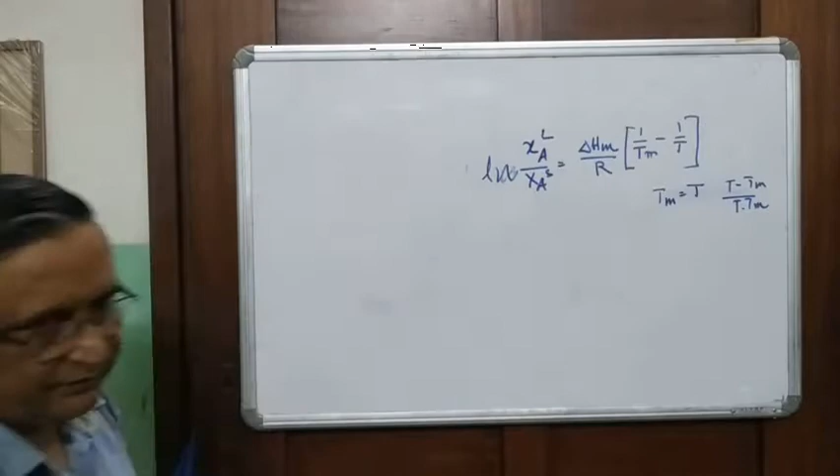Oh, I forgot, ln of this. So if we take T equal to Tm and this whole term becomes equal to 0, then we come to this relationship: XA in the liquid divided by XA in the solid is equal to 1, or XA liquid is equal to XA solid. That means if T is equal to Tm, XA in the liquid is equal to XA in the solid. So in the binary diagram, both of them have the same composition. There is no other possibility by which this can work.

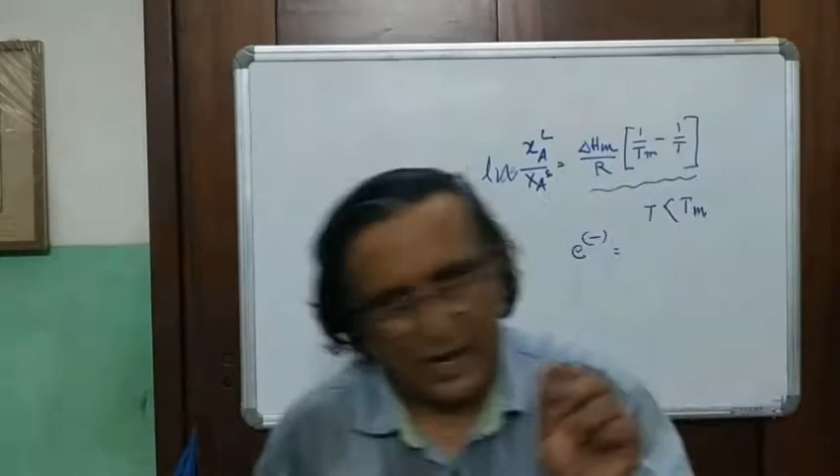But if we take it slightly differently, that T is less than Tm, then this term is negative. If this term is negative, then we have e to the power of a negative term, and so the ratio will not be equal to 1. Therefore, at a particular temperature, XAS and XAL will not be equal. That means they will have a different composition.

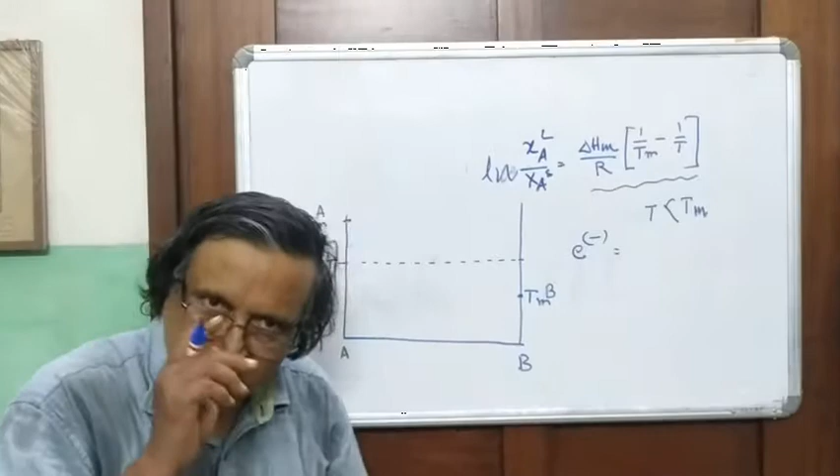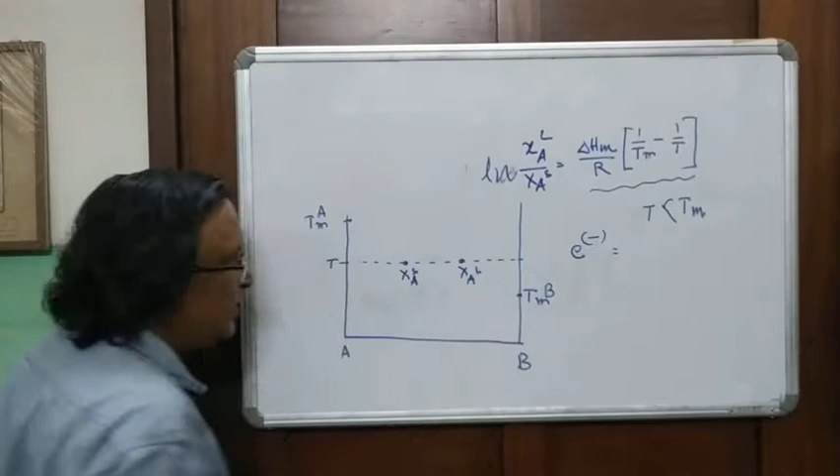So if we draw a binary diagram where we take A and B, and TmA and TmB, then if you take a particular temperature T here and draw an isotherm, XA solid and XA liquid will not be the same. They will be different. So it will be something like XAS and XA liquid. If we change the T value to another value, then obviously this ratio will also change. And similarly, for another T, this ratio will change.

So what will happen eventually to the phase diagram? We will land up with this type of a diagram: A, B, temperature. And you will end up with some sort of a figure like that. Have you understood? If you take a particular temperature here, then this is the composition of the solid and this is the composition of the liquid. Remember, here XA is equal to 1.0, and here it is 0. So at any particular temperature you will have 2 points, and this is how the phase diagram will look.

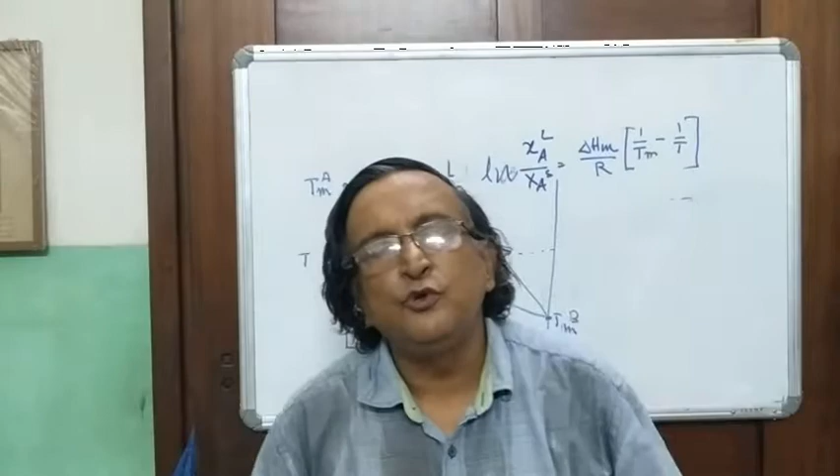Now in this diagram, this is liquid and this is AB solid solution. Do you remember in the last diagrams we called it pure A and pure B? But here I am saying AB solid solution. That means A and B are not pure phases anymore, but form a solid solution, like I talked to you about before these sets of lectures.

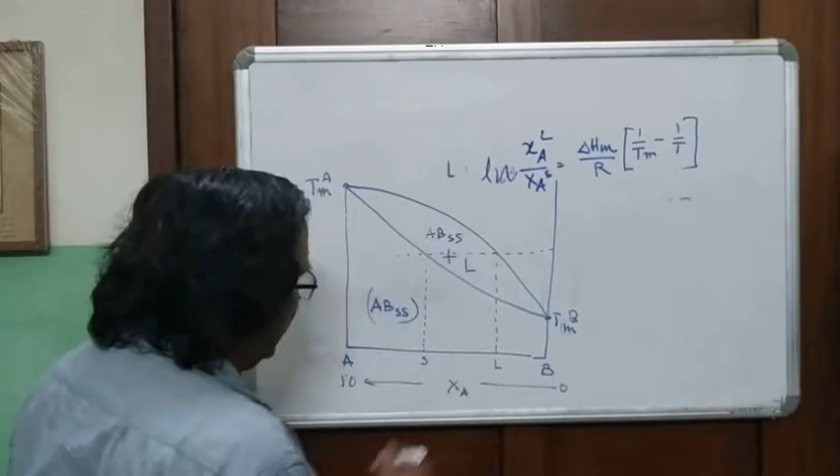And in this part of the diagram, you will have AB solid solution plus L. So this is what you get from the phase diagram. And this line, as always, is the liquidus, and this is called the solidus. So we have what is called the liquid.

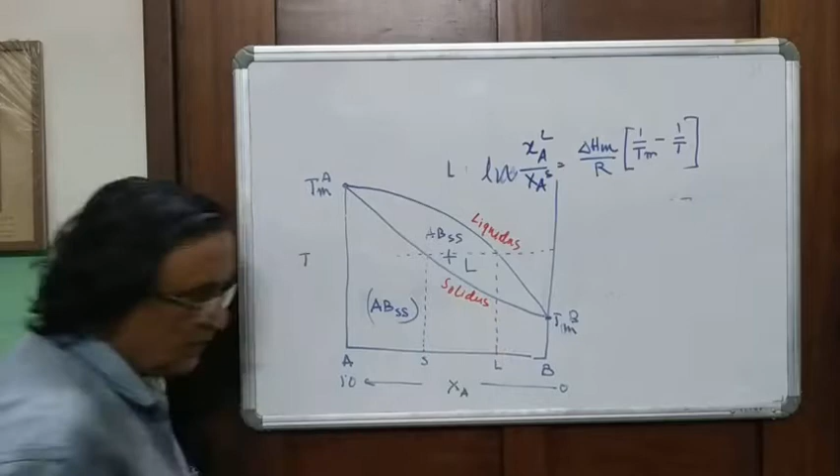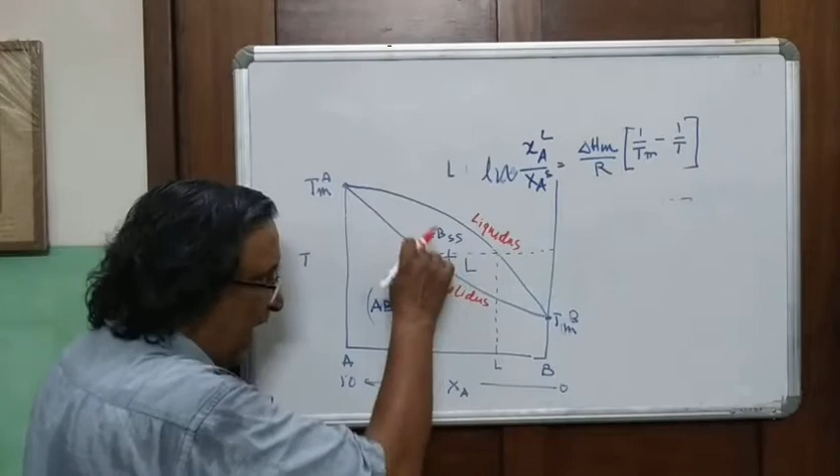Above this temperature we have the liquidus. At temperatures above this you have just liquid, and this is the solidus. At temperatures below this you have only solids, AB solid solution. And between the solidus and the liquidus you have a solid solution, AB solid solution, in equilibrium with the liquid. So this is how the phase diagram in general looks.

It can take more complex shapes, but we don't go into that at the moment. You can see you will have A and B, where one of the components will have a higher melting temperature than the other component. So this will be more refractory in this diagram as drawn. A is more refractory in nature. Refractory means it is of a higher temperature than B.

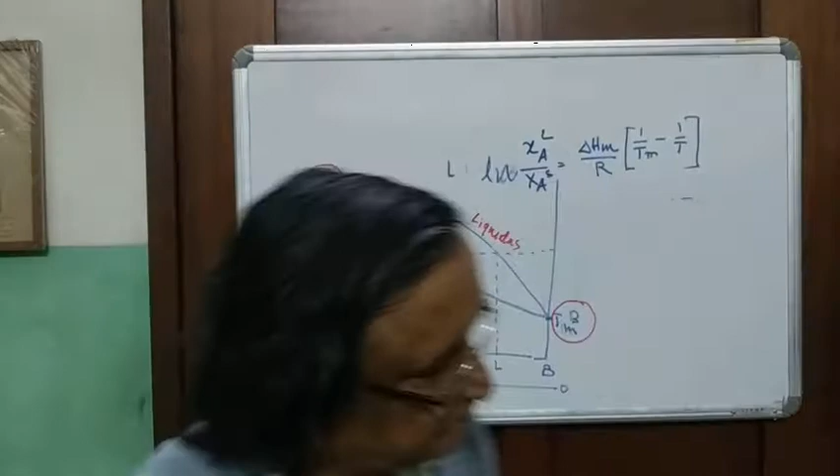So now in this lecture we will talk about how crystallization and melting occurs in this rock, involving a melt, which is a liquid solution of A and B, and a solid, which is a solid solution of A and B, and you have an intervening zone separating the liquidus and the solidus, where the two minerals and the liquid are in equilibrium. So we try and read all this diagram.

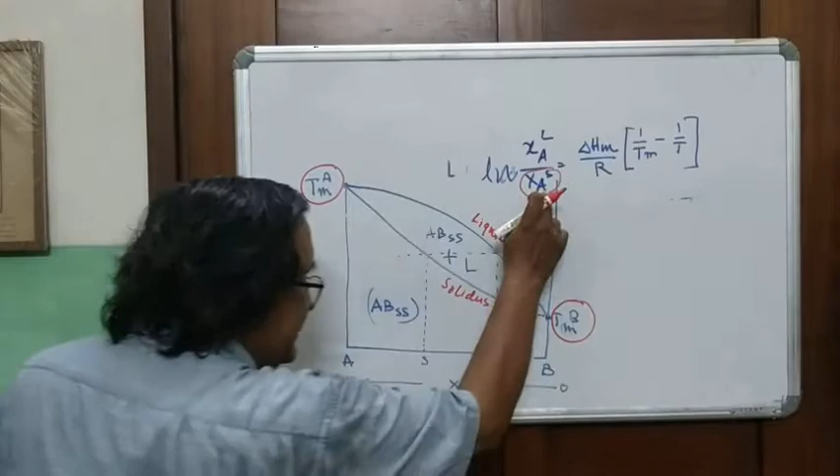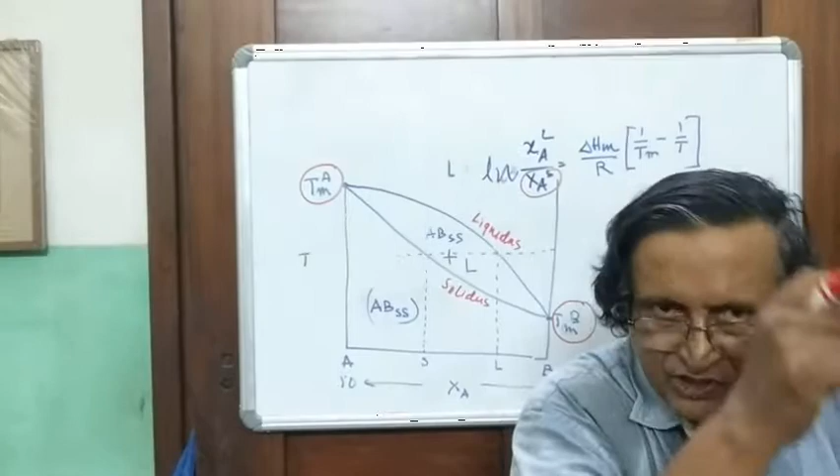So now here you see the important part played by XA solid solution. This XA is now a variable. In the last eutectic crystallization, XA in solid was not a variable. Only XA in the liquid was a variable. Here, XA solid and XA liquid are both variable. Okay, having said this, let's draw a diagram and let's get going.

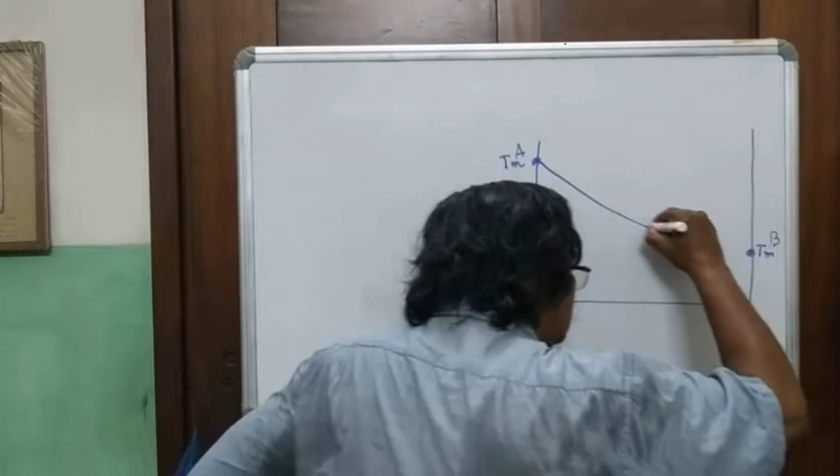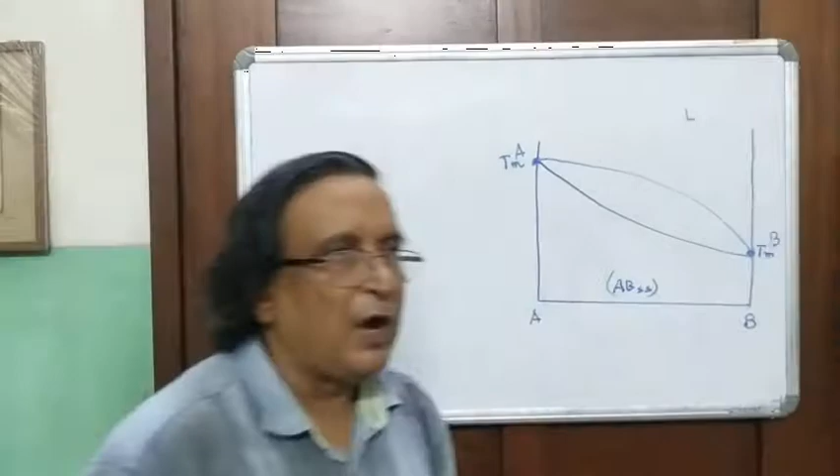Remember, the higher temperature one is the liquidus and this is the solidus. Here you have AB solid solution. Here you have the liquid, and here you have AB solid solution plus liquid in equilibrium. And first we will talk about crystallization from a melt.

Okay then. So let's take a melt of this composition. Maybe we shift the melt a little bit here. So let's say this is 50, this is 25, and this is 75, and this is XA, and this is 100 weight percent. If you write this is weight percent, then it's fine. You can also write XA, and then it would be 1 and 0. So this is, let's say, weight percent.

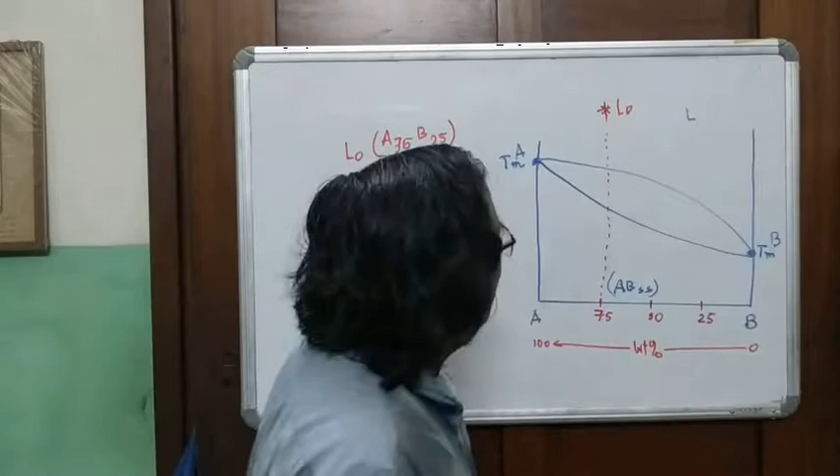So now, if we take a melt at this composition, the composition of the melt at this point of time is the initial composition, and we write this as L0, and with L0 the composition is A75 and B25. This is the composition of the initial melt. Now, if we cool down L0, this is a melt where A and B components of the melt are present in the ratio 75 A and 25 B.

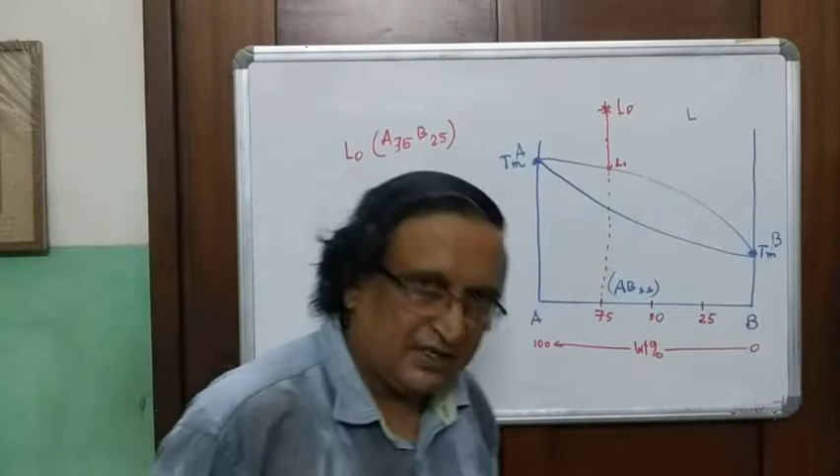And if you start cooling it, obviously the temperature goes down along this isopleth and reaches this point. This point is, let's say, L1, and this is what is called the liquidus. At this point, this field is AB solid solution plus liquid. The moment you're on the liquidus, you should be precipitating AB solid solution. So if this is L1, then this is S1, and the temperature is T1.

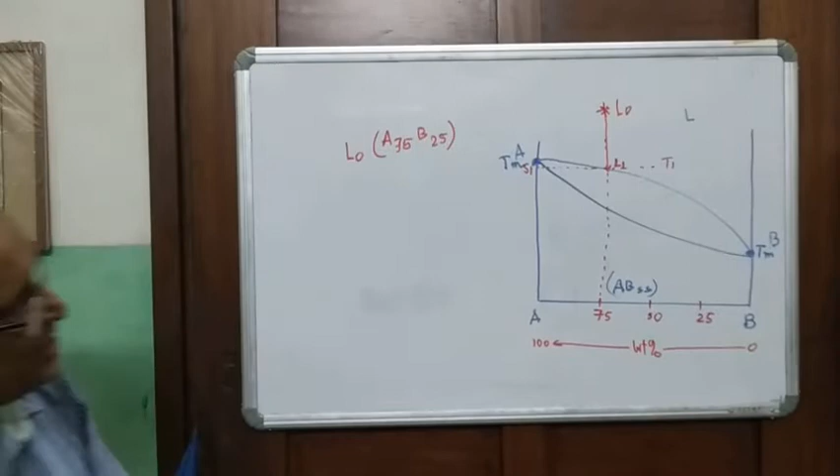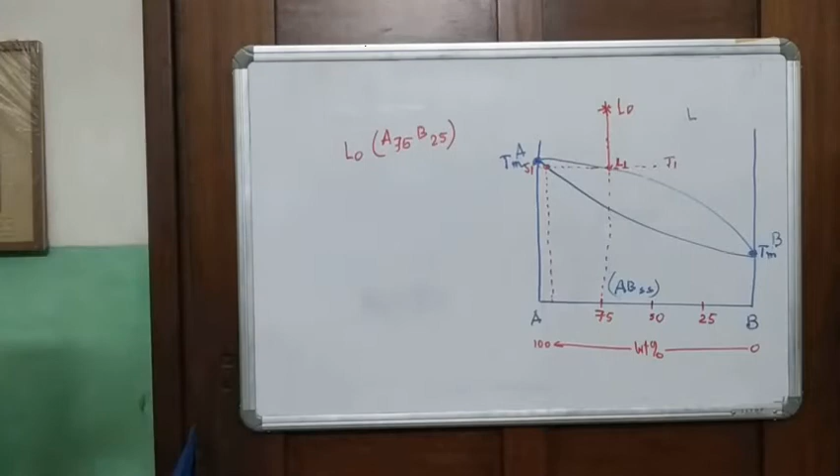So at this temperature T1, when the liquid composition lies on the liquidus, immediately the requirement has to be fulfilled that the liquid has to be in equilibrium with the solid. And how do I find out? At T1 I draw a line, and this point then is the composition of the first solid. So corresponding to L1, you produce a solid which is S1,

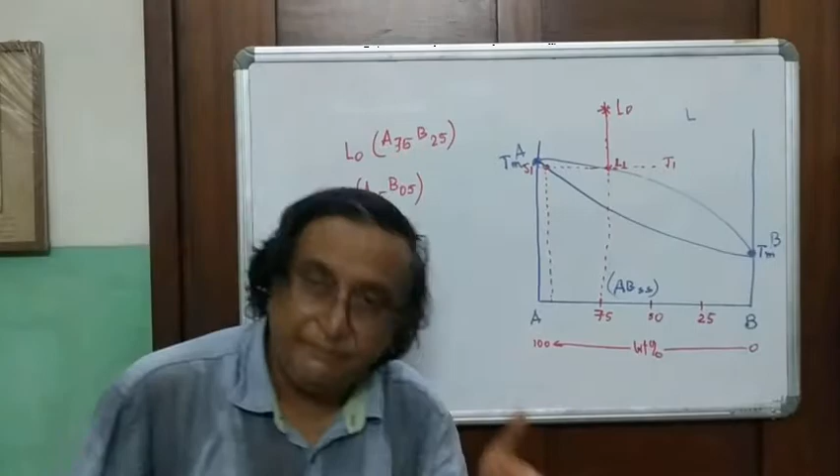and S1 has the composition of possibly A95 and B5. Now remember, this is not a mixture of pure A and pure B. Here you have a mineral AB in which the component A is 95% and the component B is 5%. This makes up the mineral AB, solid solution.

Now once this happens, where you have a liquid in equilibrium with the solid solution, this solid will precipitate and this will have a composition of A95 B05. As this solid is crystallized, obviously the melt has to move, because you see the solid has more A than the liquid. So once you crystallize this solid, the liquid composition becomes impoverished in A. So the liquid becomes enriched or richer in B.

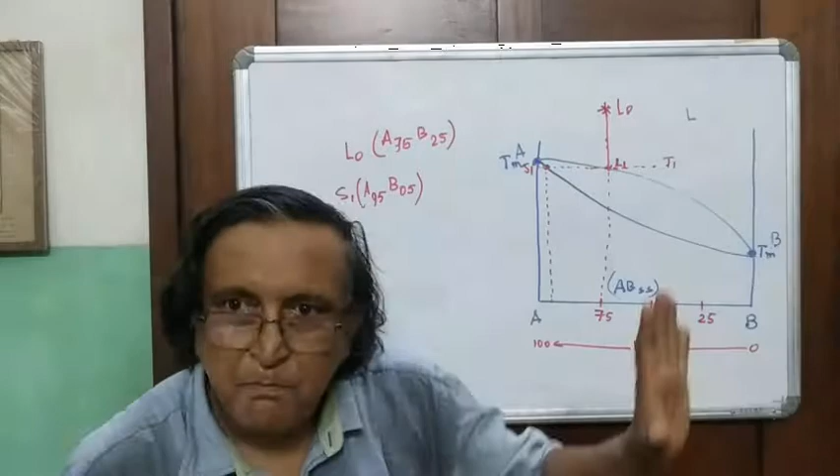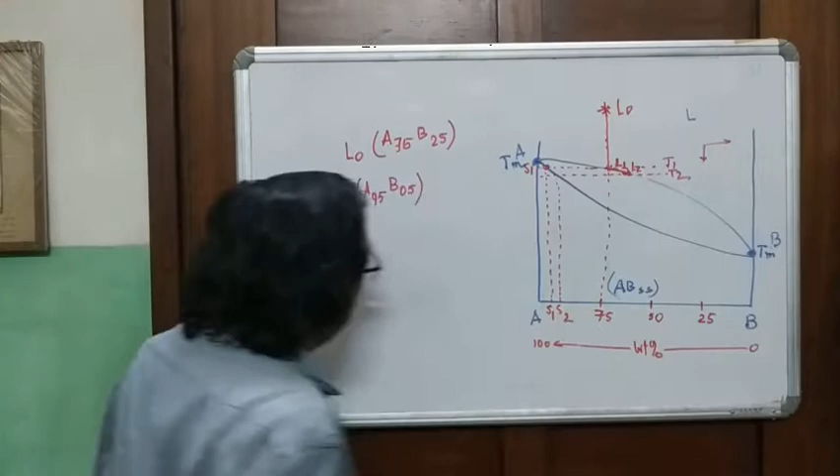So the liquid composition moves in this direction, but at the same time you have cooling, so this is also the direction. So effectively the liquid composition moves along the liquidus, and yet you have an equilibrium between the crystallized solid and the melt. So you have a new liquid composition L2 at a temperature T2, and this line intersects the solidus, and this gives you the composition. This one was S1, this one is S2. And S2 is A90 B10.

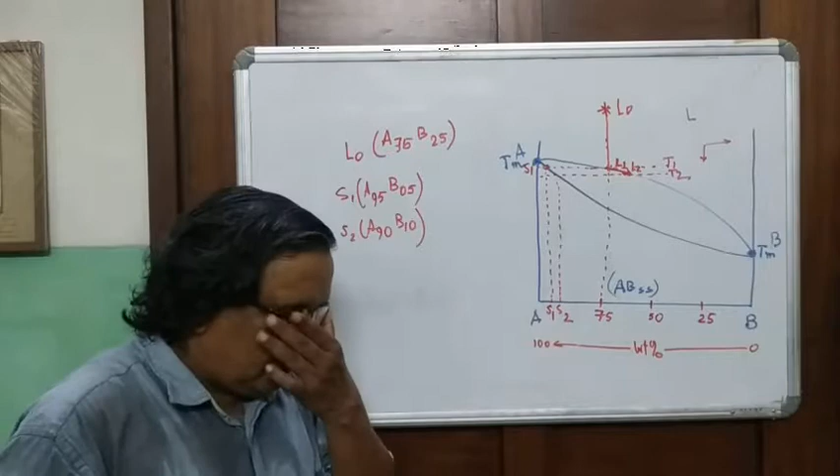Now you can ask me, what is this? You must understand that the S1 solid was in equilibrium with L1, which had this composition. Now the liquid composition has moved to L2, at temperature T2, and at this temperature, if you draw a line, it intersects the solidus curve here, and you produce S2. That means the solid S1 has now been converted to solid S2.

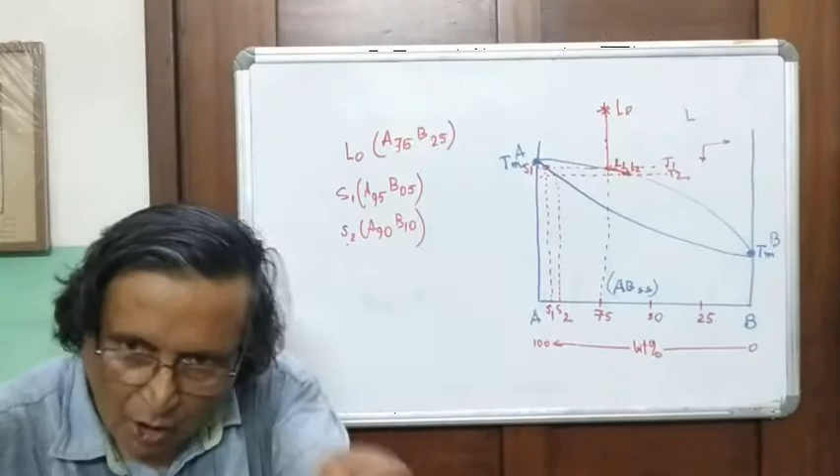Solid S1 has been converted to solid S2, meaning that the composition of the mineral has changed. Previously, if you remember, when we were discussing the eutectic, the composition of the mineral was always fixed and it was pure. Here, the composition of the mineral changes. That is very important.

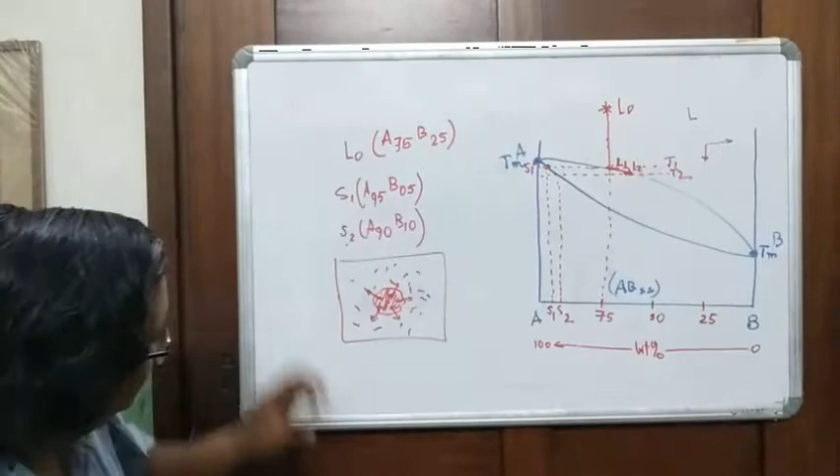That means what? If you have a crystal that is crystallizing, and outside you have a melt, and this forms a particular system, then there is constant interaction between the crystal and the melt. There is constant element transfer between the crystal and the melt. As this crystal changes from S1 to S2, if the composition of the mineral has to change, then the melt composition with which S2 is in equilibrium has also got to change, because it's a closed system and nothing comes in, nothing goes out. Right?

So in this type of diagram, the most important difference is that the crystal and the melt always exchange matter across crystal-melt boundaries. And another thing is happening here. If this point is S2 and this one is L2, and if I write this one as L0, then you can see this divides it into two parts: S2 L0 and L2 L0. Can you see this?

Now, as we have done before, if I write this as M and this as N, then M divided by M plus N should give you the fraction of the melt. Have you understood? And this part, L0 L2, the factor N divided by M plus N, is the fraction of the solid.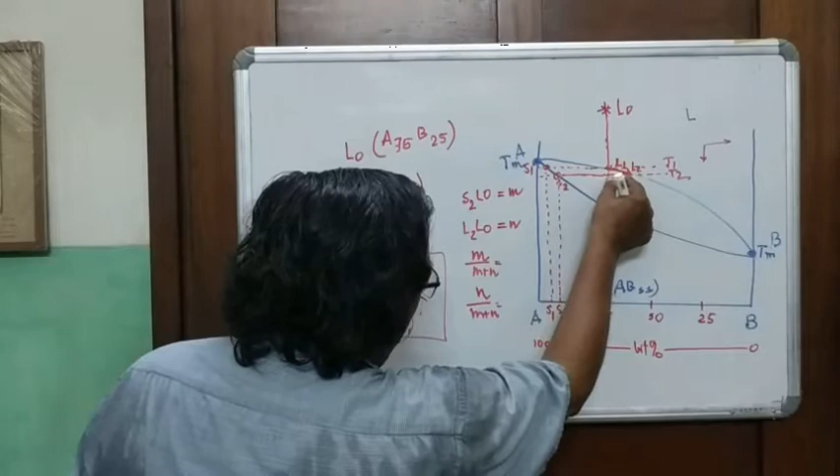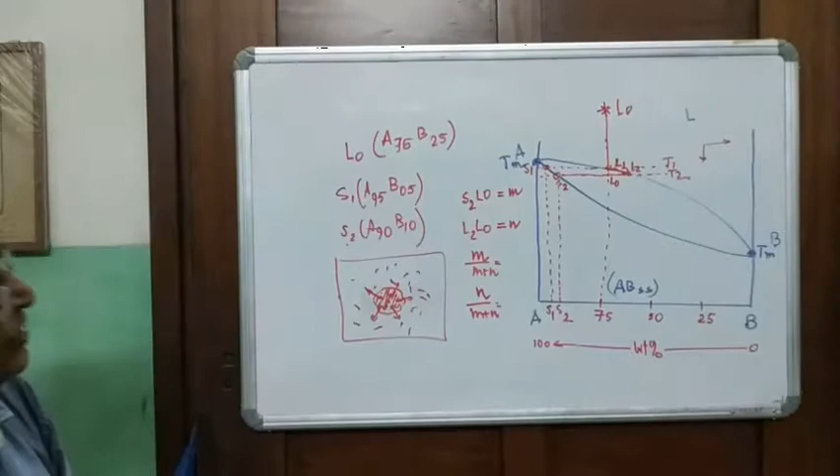So going from L1 to L2, two things have happened. The fraction of solid has increased, because the length of N has increased, and at the same time the composition of the solid has also changed. The composition of the mineral has changed, as well as the crystal-melt ratio, and you have a much larger fraction of the rock. Have you understood? So this is how crystallization continues.

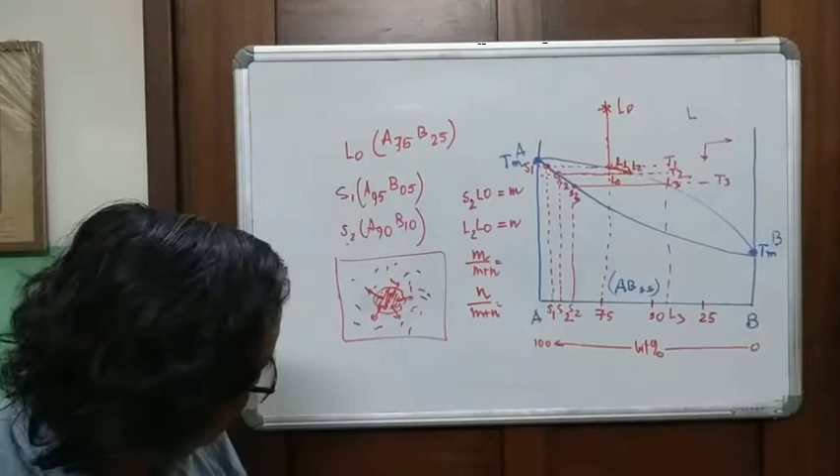So you can imagine another point. This will be T3, this will be S3, and now this will be L3. Here you can find out the composition of S3 from this axis, and here you can find out the composition of L3. The L3 and the S3 compositions are different.

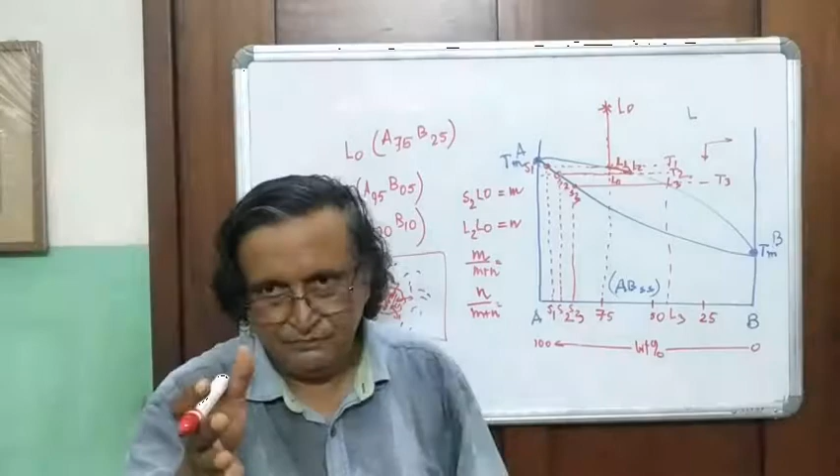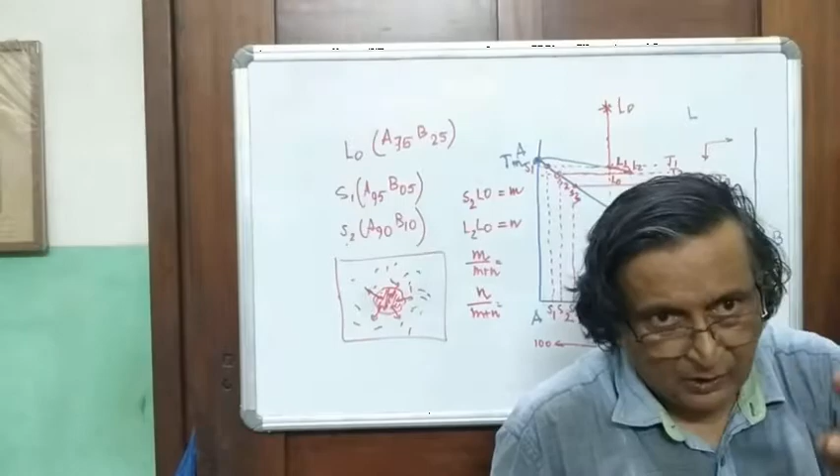That is why in the equation that I showed you, ln XA liquid by ln XA solid was a decimal. So they are not the same, they are not identical. And ln was negative, and therefore it was not 1. So now what is M now? M now is this. Can you see? This is now M.

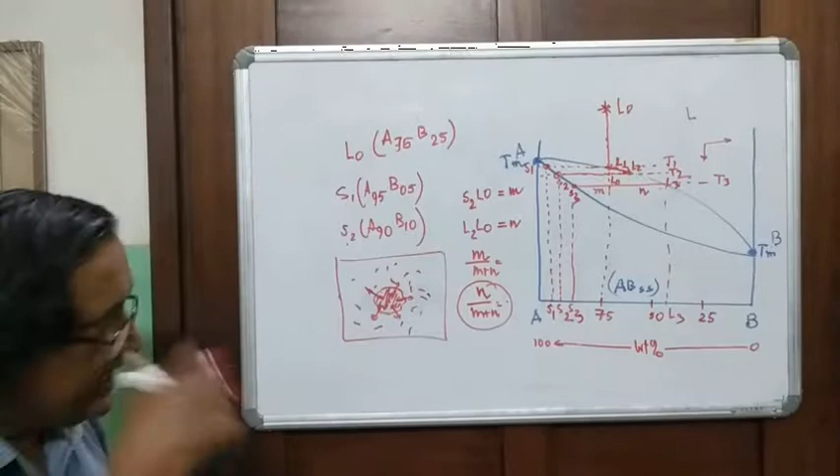You can see you started from M with N almost equal to 0 here, and now as crystallization has progressed, N has become larger and larger, and M has become smaller. And M divided by M plus N, which is the fraction of the liquid, is becoming less, and N divided by M plus N, which is the fraction of the solid, has been increasing. And at the same time, the mineral composition itself is changing, as is the composition of the liquid.

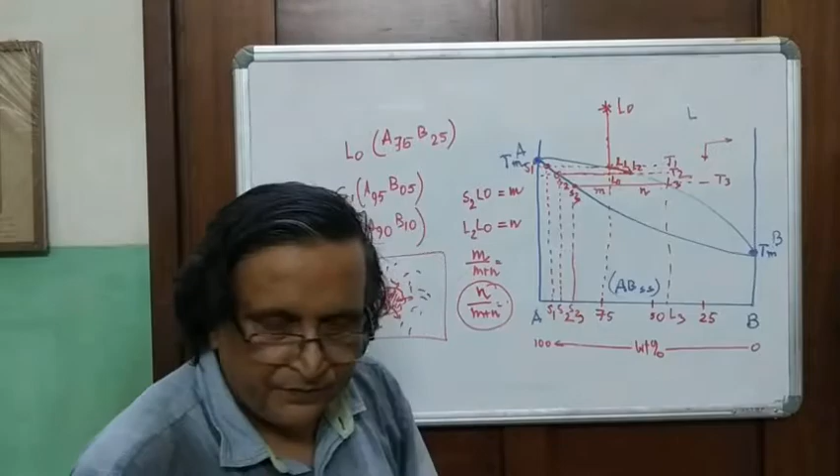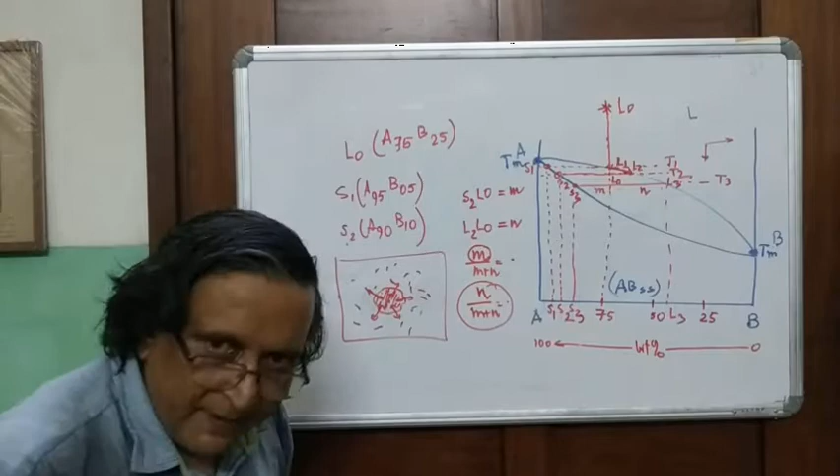Now, when will this event stop? If this is the fraction of melt, then M will become equal to 0. Where will M become equal to 0? When this S3 point reaches here. Can you see this? This is where you will have L4, and this is where you will have S4, and this is the point where it was L0. So when the composition of the solid along the solidus coincides with the initial composition, this will be the new composition of the melt.

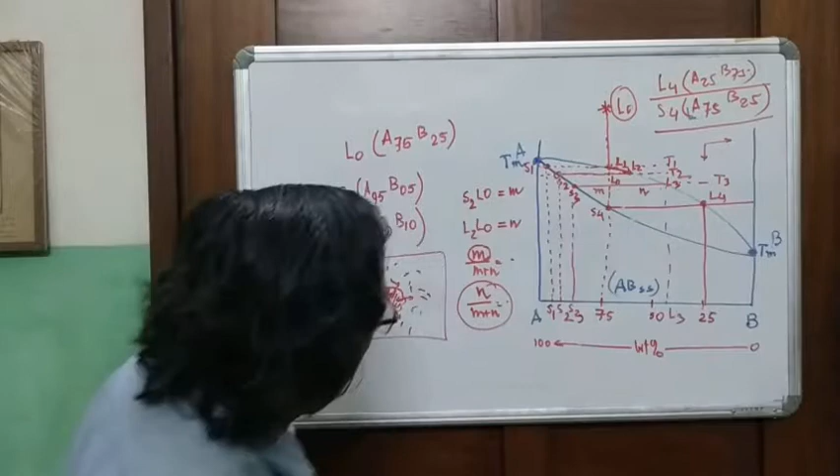That means here, say, L4 will be equal to A25, B75, and S4 is the reverse, A75, B25. This will be the last solid which is in equilibrium with this composition. And S4 will be equal in composition to the initial liquid for equilibrium crystallization. So this is essentially what will happen.

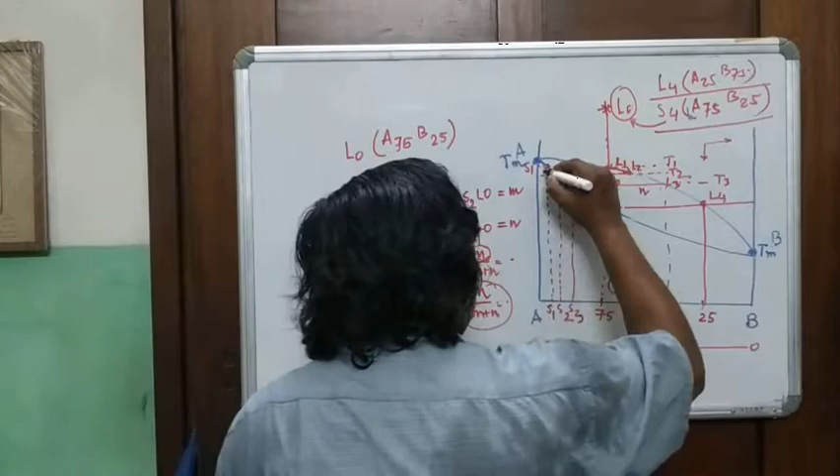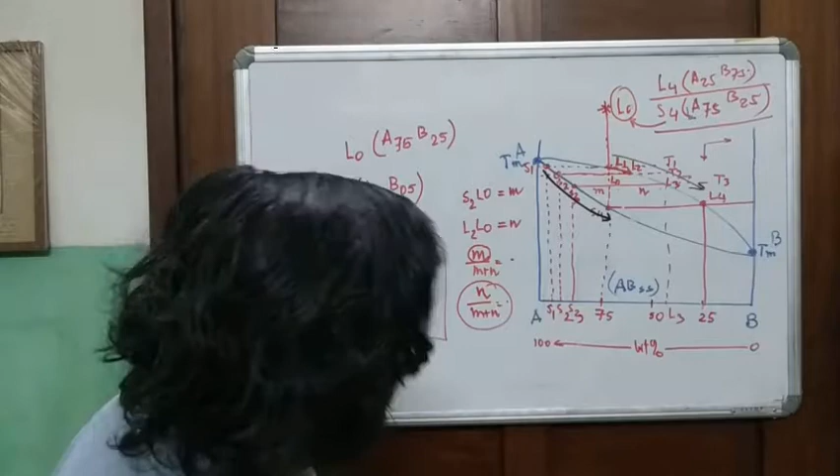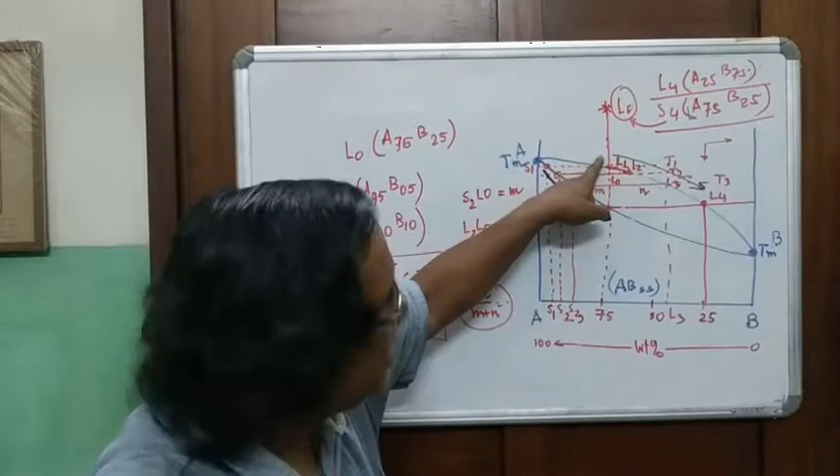As you crystallize, the solid composition moves from S1 to S4, and the liquid composition moves from here to here. The important part is the liquid composition was initially here, and then it moved towards this. That means, to start with, the liquid was richer in the higher temperature component, but ended up being lower.

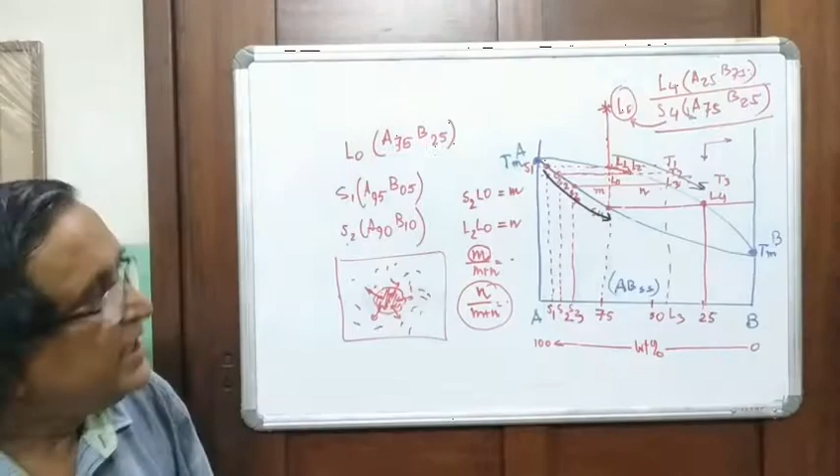Similarly, the solid started very enriched in the high temperature component A, but through interaction with the melt, the crystal composition continuously changed till it reached the same composition as the initial melt when the last drop of liquid was exhausted. At this point the fraction of liquid is almost gone; the whole is now N. This is how crystallization happens in a solid solution phase.

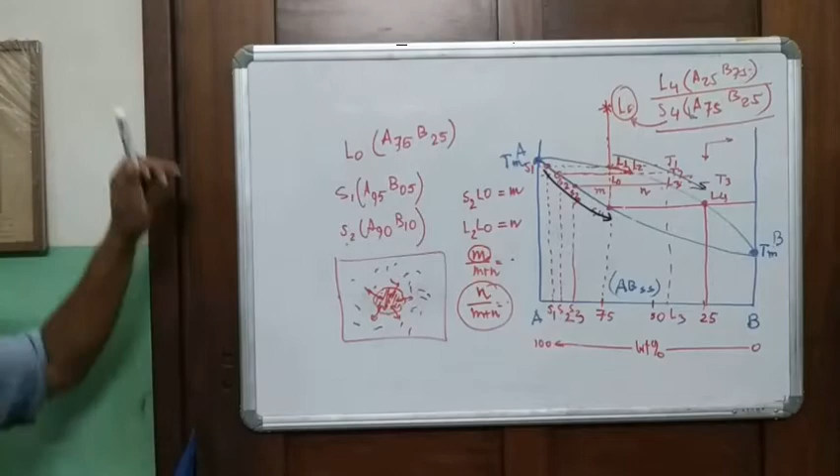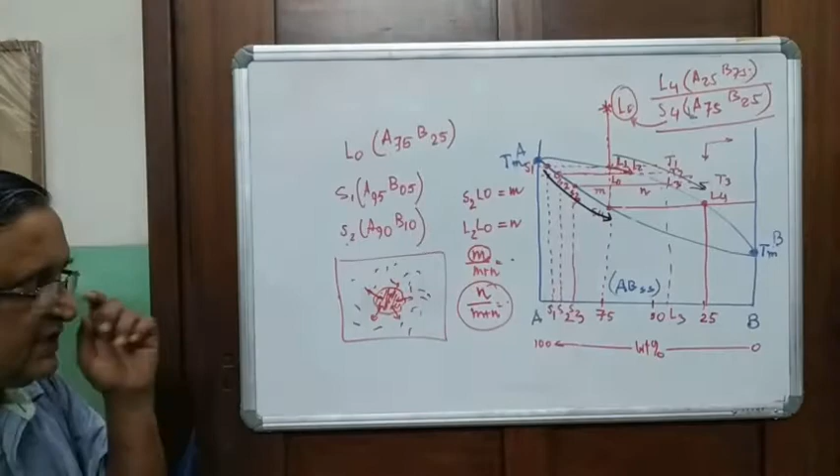There are many facets to this, but we will discuss them in a different context. First, let us concentrate on equilibrium crystallization. We discussed equilibrium crystallization of a simple binary eutectic system involving pure solids, then a binary system with impure solids and impure melts. We are still left with equilibrium melting, which should be a process that is the reverse of crystallization. So I will erase this and draw it again.

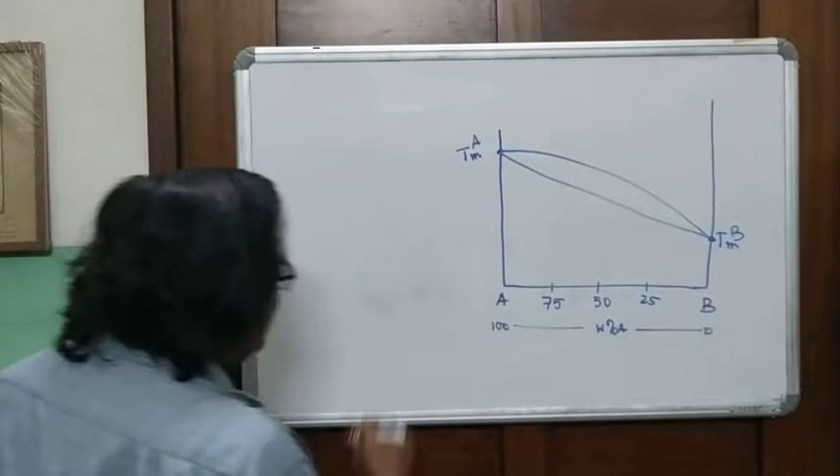So, let's take a rock R0, and let's say this is A50 and B50. This is the composition of the rock, and I draw a line like this. This is the rock composition, R0.

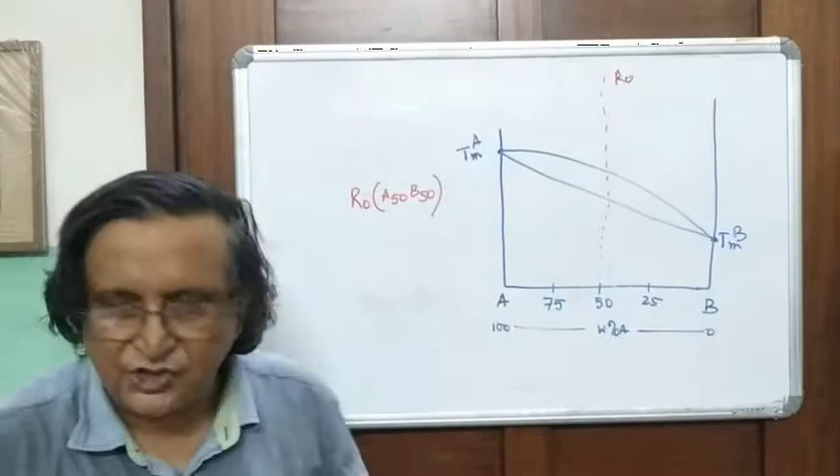Now, if I ask myself a question and answer it, the first is, if I heat the rock, when will the melting occur? When will the rock start melting? The answer to that question is, as you heat the rock, the temperature of the rock increases till it reaches the solidus. Till the temperature of the rock coincides with the solidus.

Have you understood? So let's say this temperature is T1. At this temperature, when we heat the rock, this temperature is the temperature of the solidus. Remember, the temperature of the solidus changes as a function of the composition. If I take a different rock here, for example, you can see here, melting would be initiated at a lower temperature.

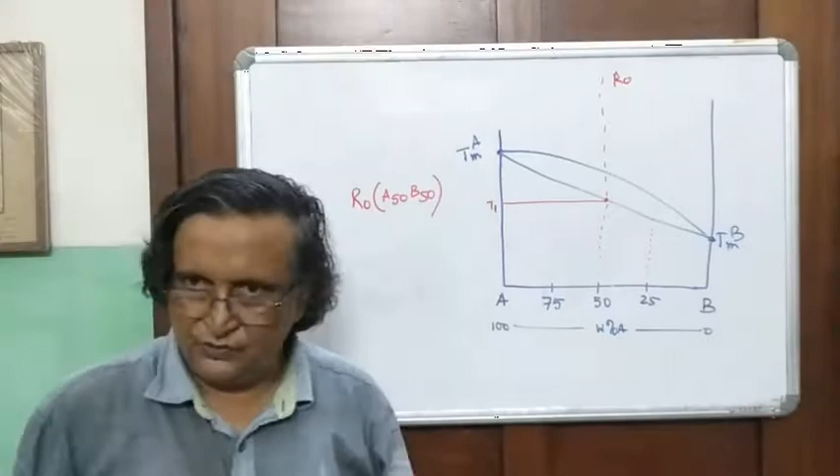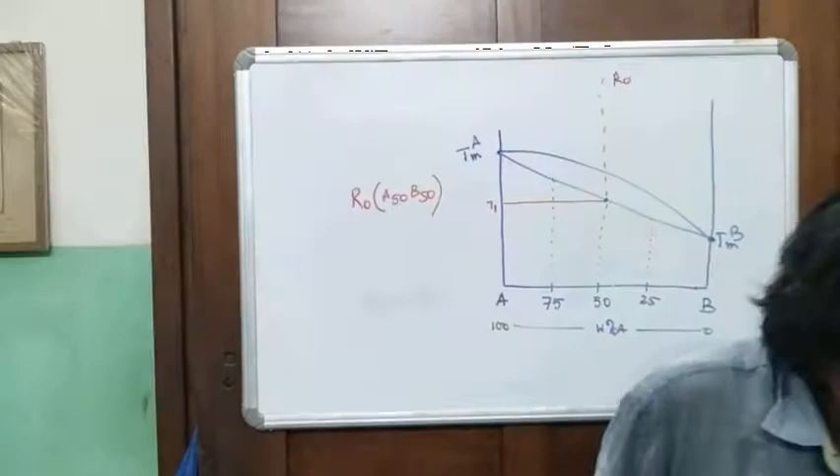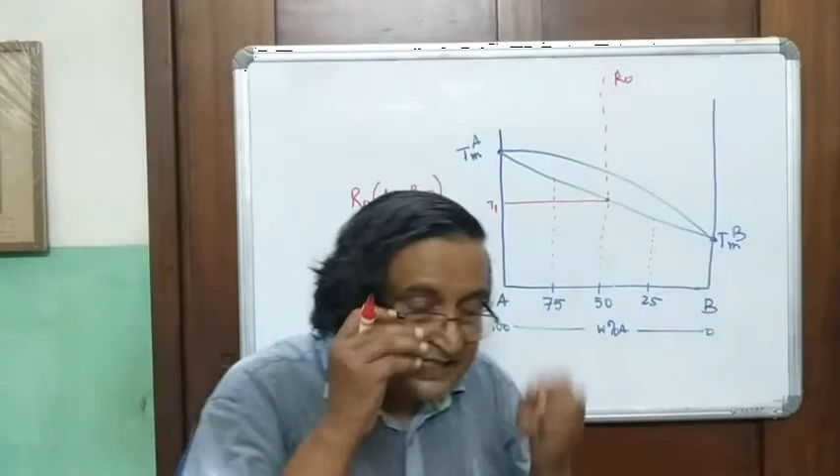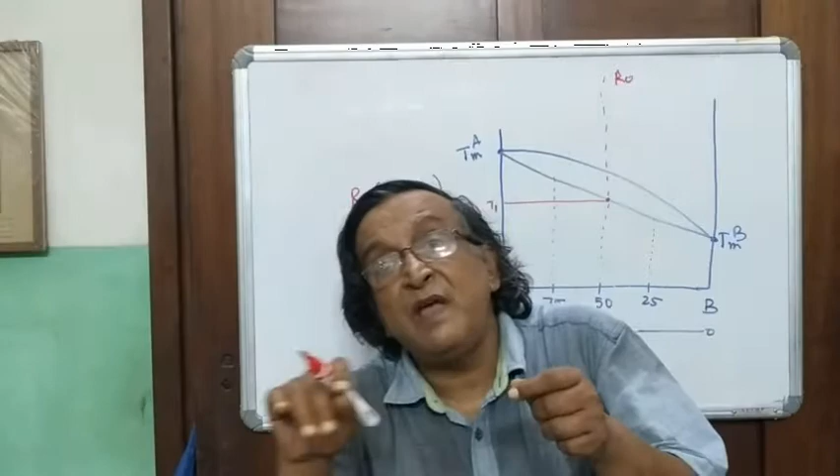Have you understood? If I take a rock which is more enriched in the refractory element, more enriched in A, then the melting temperature would be different. So, the temperature at which a rock would melt depends on the composition of the rock. This is a major difference from the simple eutectic system. If you remember, in the simple eutectic system, no matter what you heat, the first melting temperature remains the same. Remember, it's the eutectic temperature. But here, there is no eutectic temperature.

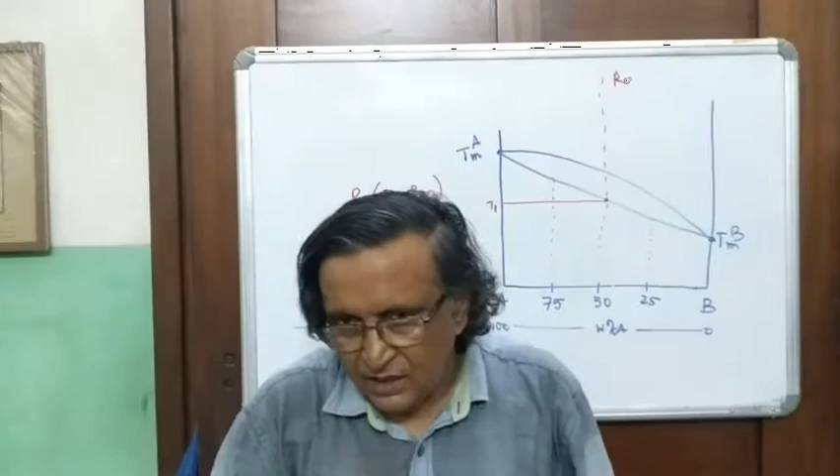If you melt a mineral, the melting would be initiated at a temperature depending upon the composition of A and B in the mineral. But in the eutectic system, the proportion of A and B does not dictate the temperature of melting at low degrees of melting. Remember, there it was always the eutectic temperature, no matter what proportion of A and B you took. So long as A and B were there, the melting temperature was fixed. But major differences are here, where you will see this is not valid if you have mineral composition. So I will erase this at the moment.

And so, for example, at temperature T1, this will be the composition of the solid. What would be the composition of the liquid? Very clear. You just join it. So this will be the composition of the first liquid that forms. And this will be the composition of the first solid that is in equilibrium with the liquid L1 at the temperature T1. What I tried to say before is, if you chose another composition, you would still form S1 and L1, but they would be at a different isothermal condition, at a higher temperature, if the phase had higher amounts of A.

Now what will happen here, as you see, as S1 undergoes melting, you produce a melt, which is L1. Now the L1 is enriched in B. So your S1 becomes enriched in A. So if you melt S1 to L1, then the S composition will become S2 at temperature T2, and then your liquid composition will be L2.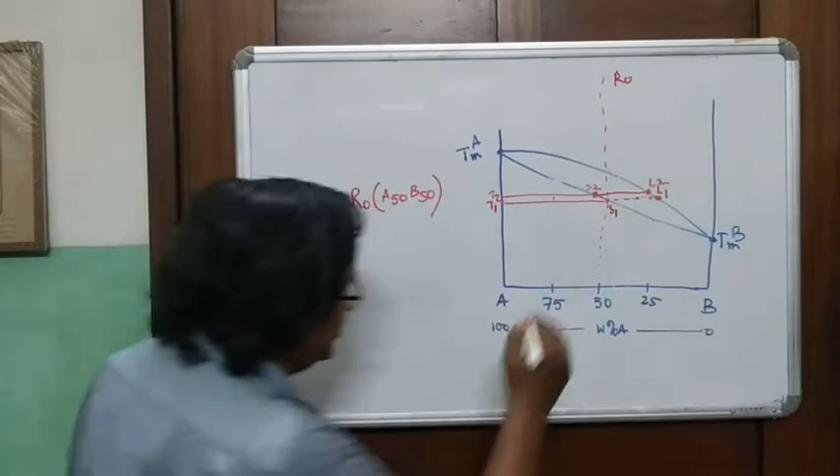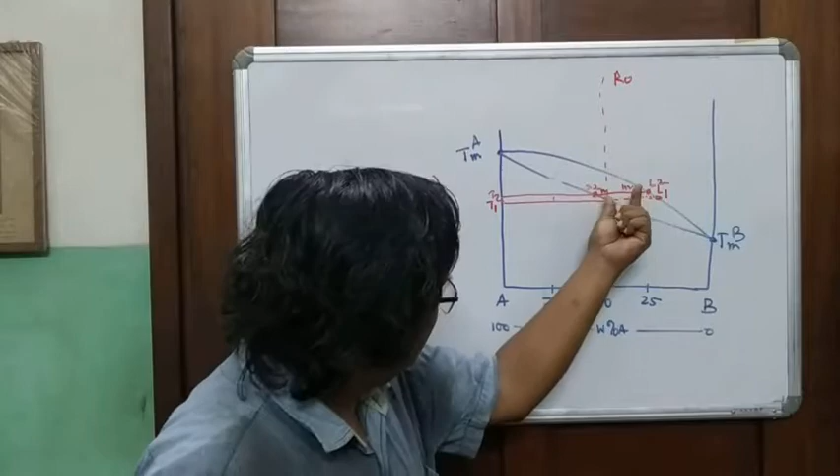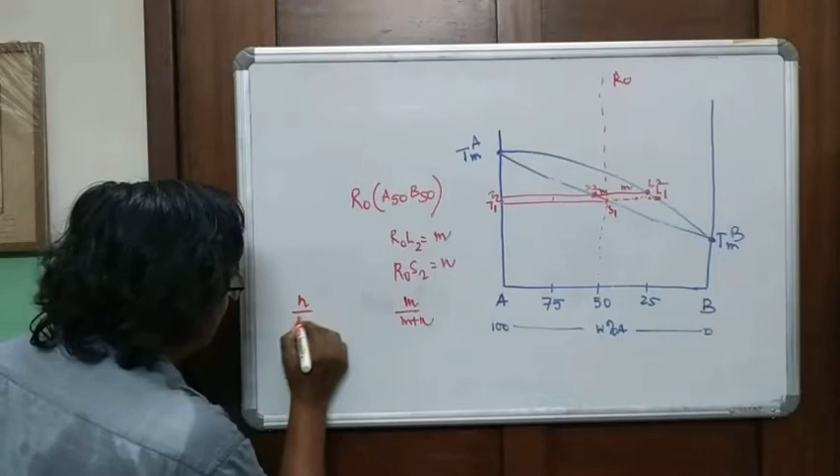And now you see this. I write M and this is N. Or once again, let me write it this way. R0 L2 is equal to M, and R0 S2 is equal to N. So what is M divided by M plus N? This will be the fraction of the liquid or solid. You see, if there is N here, it should be the fraction of the solid, right? And N divided by M plus N, this would be the fraction of liquid.

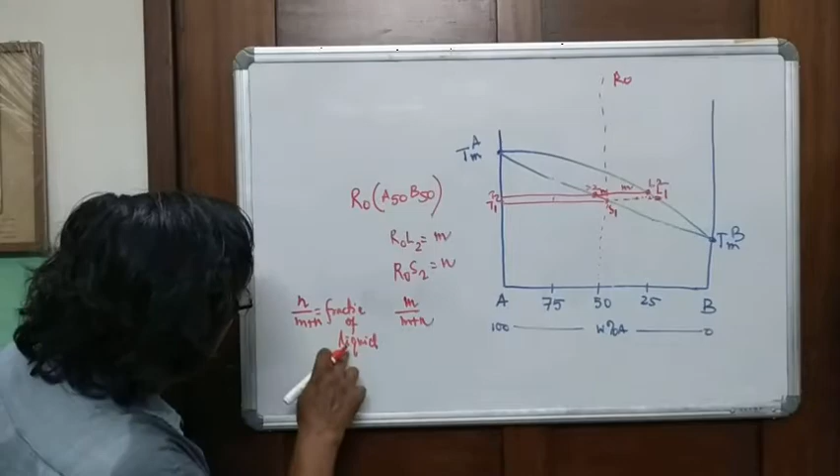Now you see, at T1, at S1, N was 0. That means the fraction of liquid was 0, obviously, because there was hardly any melt when the first melt was generated. So this will go on; it is the reverse process of equilibrium crystallization. And as more S goes into melting, you would have S3 here, and you draw an isotherm parallel to this, and you will have at this point L3.

And now you see here, this will be the new composition of L3. This was the composition of L2. This was the composition of L1. And this was the composition of S1. This is the composition of S2. And this is the composition of S3. So you can see here, L3, L2, L1.

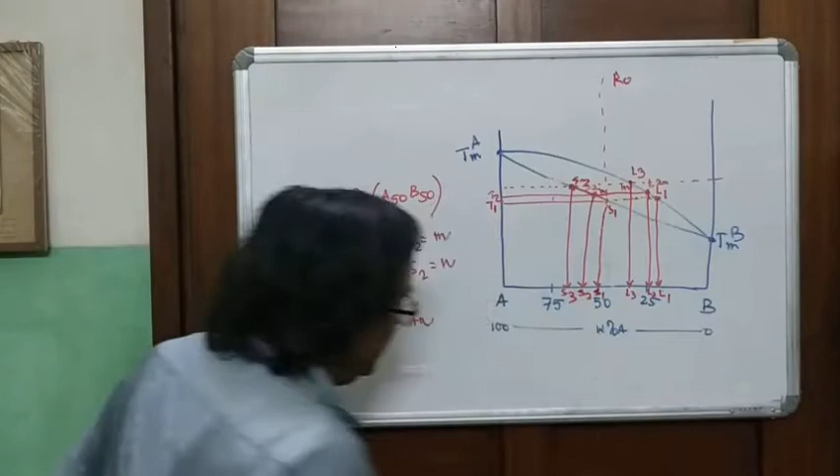And this is S1, S2, S3. So you see, from L1 to L3 and S1 through S3, the whole material is becoming richer in A. And you can see at this point, this is now where your N is. This is N. Can you see? Now the fraction of N is increasing. Have you understood? So here at S1, N was 0. This was N1. Now it's N3.

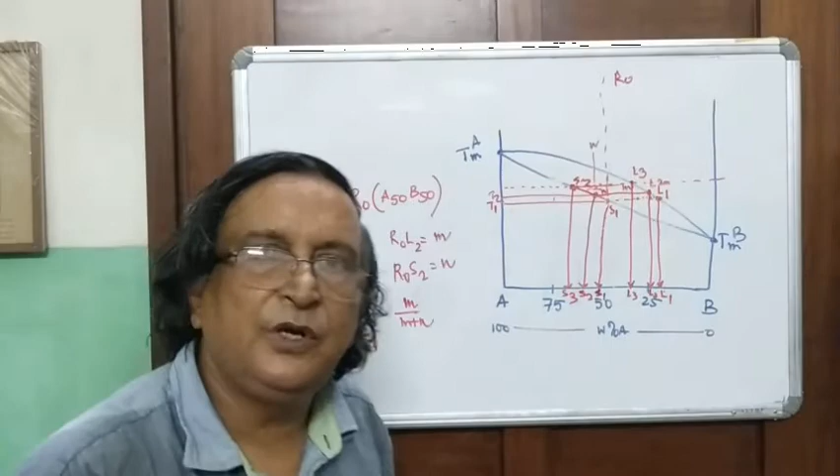So N1, N2, N3. And so you can now say what should be the temperature at which the last solid will go into melt. Which is the temperature at which the last solid will go into the melt? So if you say the last solid, then M by M plus N should be equal to 0. The last solid means the fraction of solid is equal to 0. So M now should become equal to 0.

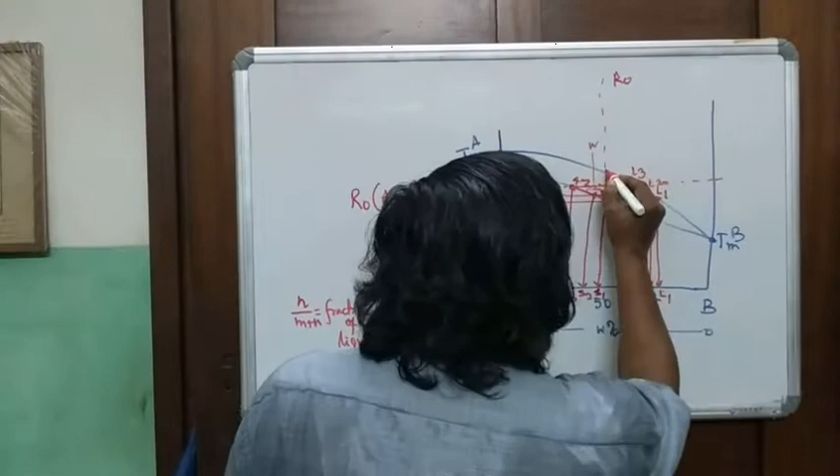If this is so, then here is the point. This is the point now. Do you see this? This is where you can see your M reducing, and here M is equal to 0. So whole of it is now liquid, and this occurred at this temperature, which is say T4. This is your solid S4, and this is your liquid L4.

Now you see here, S4, this is your composition S4, and this is your composition L4. So the last composition of the melt L4 is the same as the initial composition of the solid from which you started. It is obvious, it's a closed system. So when it is solid, it's R0. When it's fully liquid, it's L4. L4 and R0 have to be the same. Otherwise, it cannot be a closed system situation.

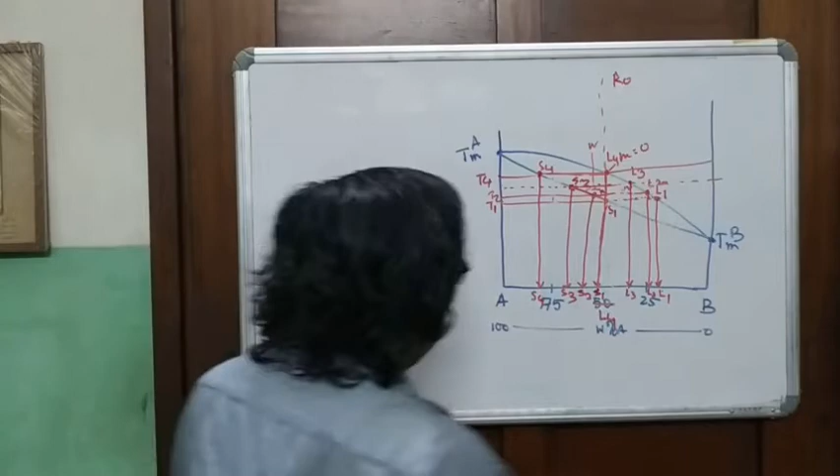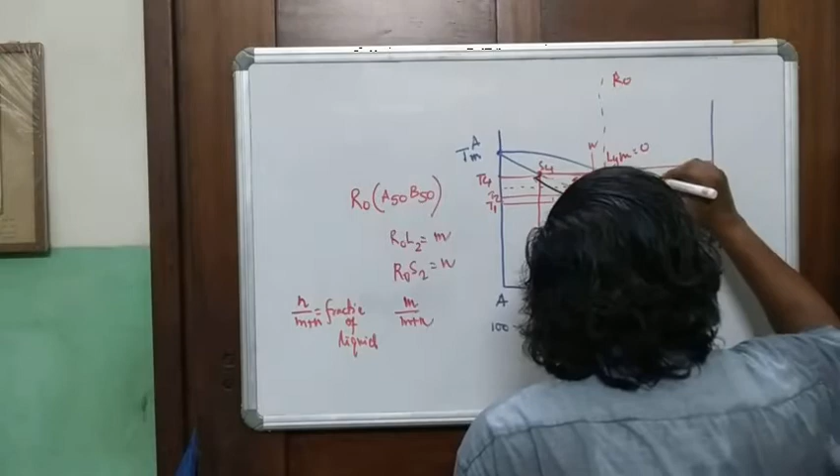So the important point to note here is there are certain important points apart from this. You see, as the melting occurred, I'm drawing this black line. This is how melting occurred, this is how the solid composition changed, and this is how the liquid composition changed over a time interval. Have you understood? So now there is an important problem here which I must tell you, and you remember this.

Remember, in the simple eutectic system, when we were melting for low degrees of melting, the more heat you gave, the more melting you produced. So there was thermal buffering. The temperature did not rise. The temperature was buffered. As you gave heat, that was transferred into latent heat of fusion and materials passed into melt, but the temperature did not change. So that caused thermal buffering. Here, there is no thermal buffering.

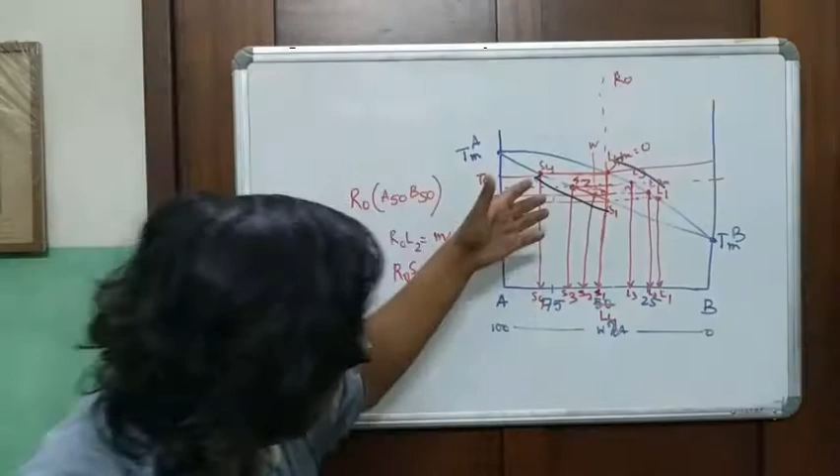No thermal buffering. And you see, S1 has a lower melting temperature than S4. So if you want to go on melting this to get from a pure rock to a pure melt, you have to supply heat to the system. There is not going to be any thermal buffering in such a binary system. It is very important to realize that when you're melting minerals which are solid solutions, the temperature needs to be continuously increased so that the rock is completely transferred to a melt.

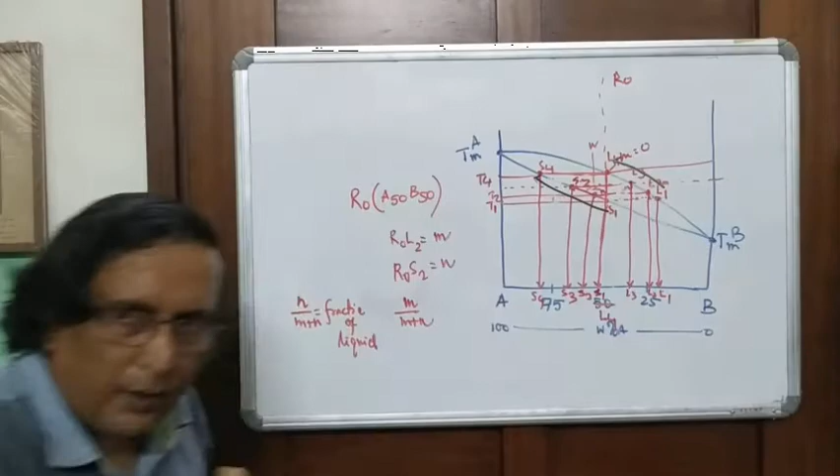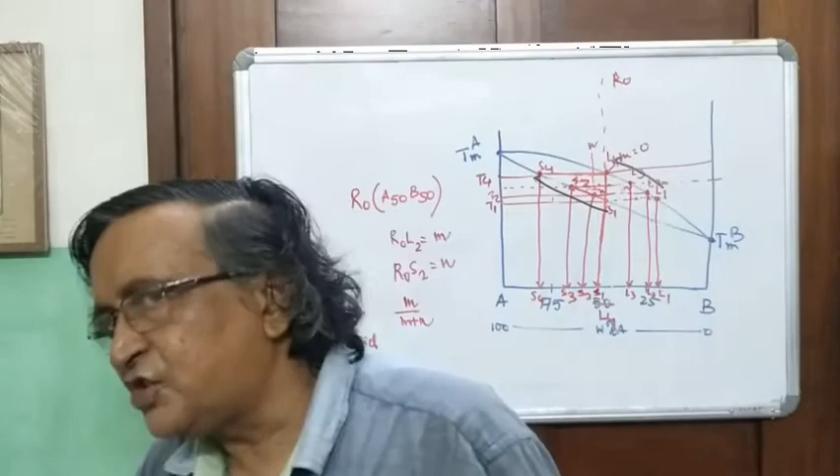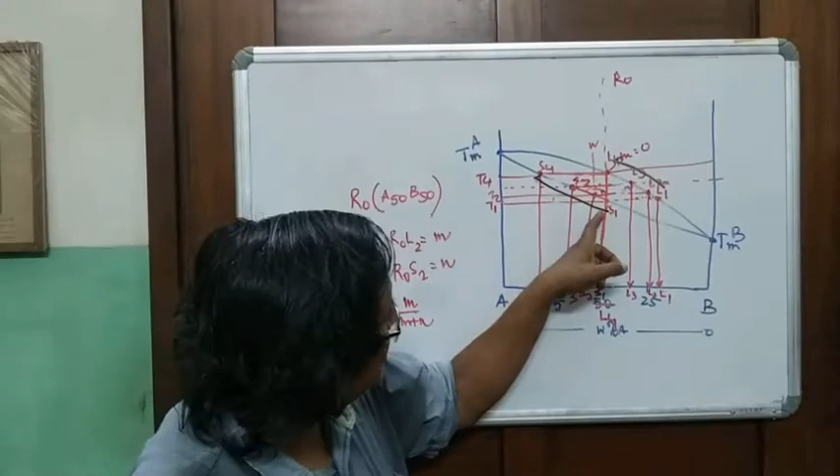There is no question of thermal buffering, which was there during eutectic melting involving solid phases. This does not happen here. I'm saying this because these are the differences between binary eutectic melting involving pure minerals and binary melting involving impure minerals. In impure mineral melting, as you melt the mineral, the low temperature fraction is taken into the melt and the mineral becomes more refractory. That means it becomes enriched in the higher melting temperature component.

So if you have to melt the next stage, then you have to heat it a little bit more. If you stop the heating, melting will stop. It will not be possible for the rock to melt anymore, because compared to S1, the mineral S2 has a higher melting temperature. So you have to go on supplying more and more heat for the rock to undergo melting, continuously. So there are major differences in melting and crystallization involving pure phases and those involving impure phases.